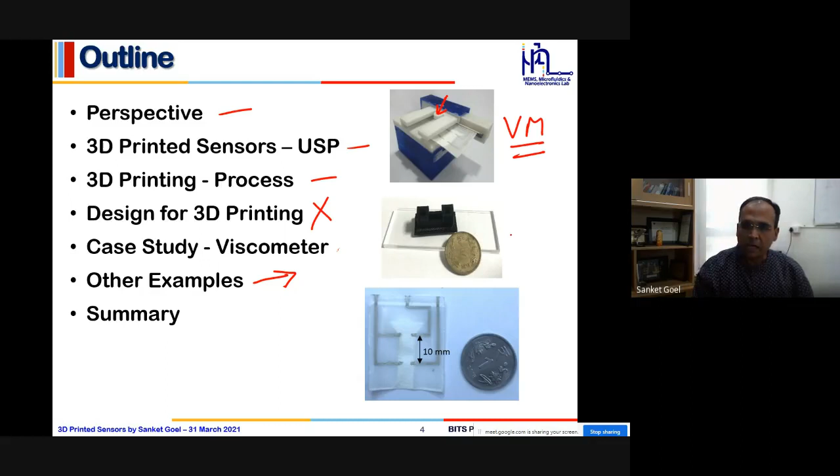And this is the same device, which you can see, kind of a top view. You can correlate it with a 1 rupee coin, which has become kind of a hibernation these days, but still we can kind of compare it.

So before I begin, let me just brag about our lab. It's a very quick video about our lab, what we do and so on, kind of a summary which we made for a funding agency a couple of years back. The lab has really evolved since then as well.

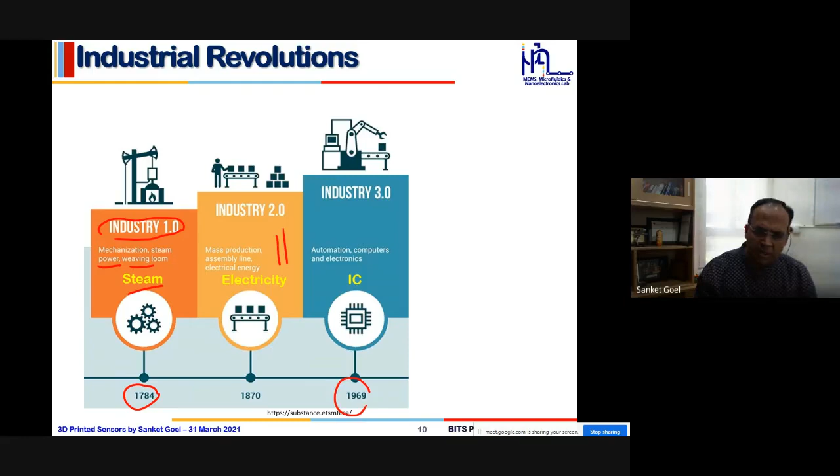And last but not least, what we have today is the internet era, the cyber physical system. So people have started calling today's era Industry 4.0, and that's why they started calling the IC era 3.0, the electricity era 2.0, and the steam era 1.0.

So it is extremely important that whatever we do, whatever we make today, we always see it through the lens of internet and cyber physical systems, so that the work being done today, by us or by a given lab, benefits society at large. And of course it has many more benefits.

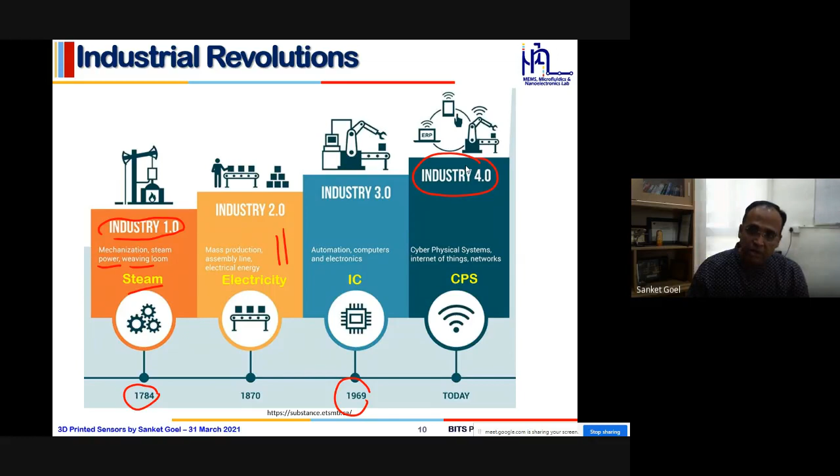So we'll be talking about how these smart sensors can be developed, or have been developed, and how the current niche about Industry 4.0 has been integrated into these systems.

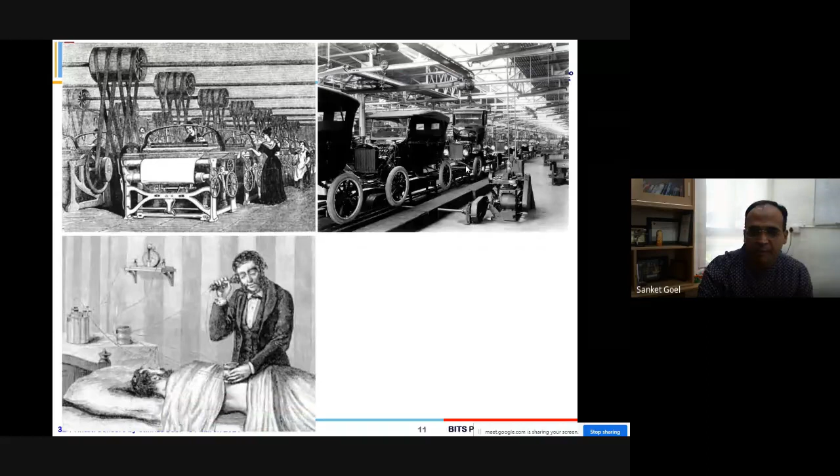So I love these pictures, these 4 black and white pictures. Those of you who would like to participate can certainly answer, except my own students who are here, because they know about these pictures quite a bit.

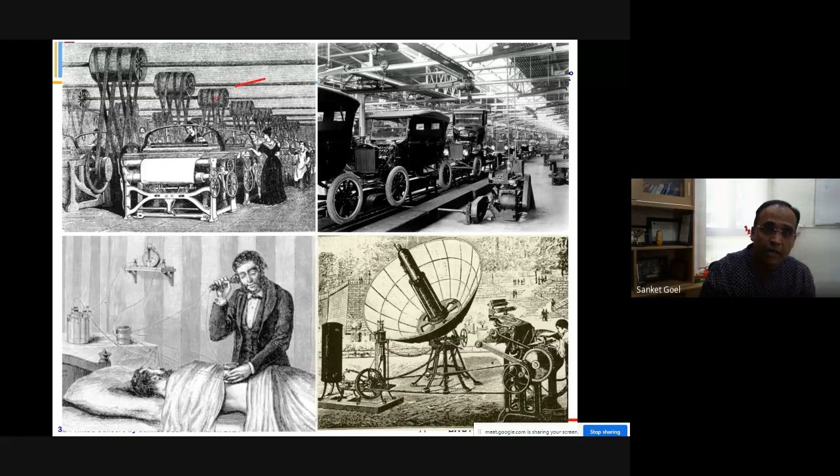So these pictures essentially talk about what industry was like around 150 to 200 years ago. As you can see, these are not just photo-edited black and white pictures, these are real black and white pictures. The top left is more of a textile industry, the top right is more of an automobile industry, the bottom left is say a biomedical industry, and the bottom right is like a solar thermal system.

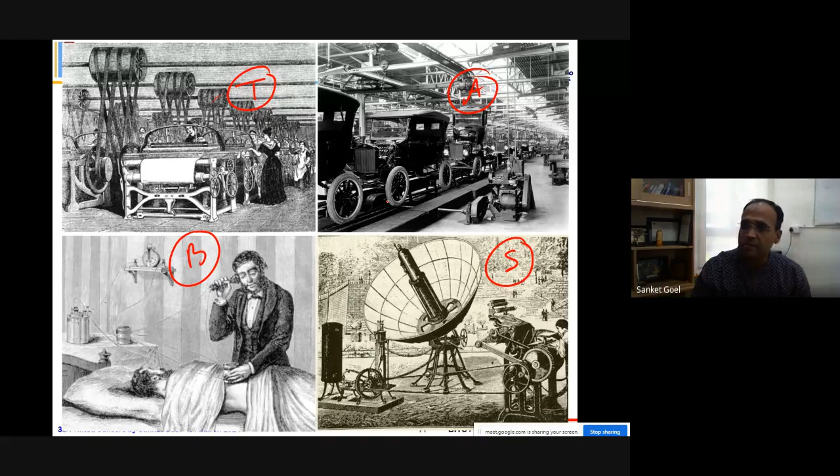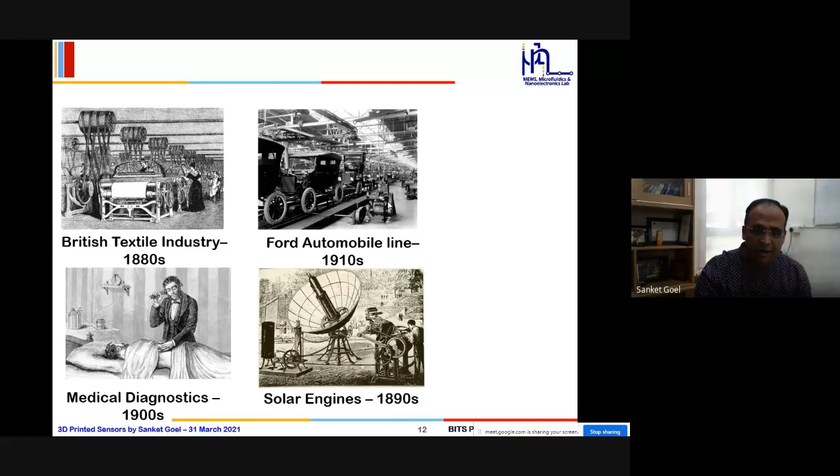One thing you can see, taking the example of automobiles, is that things were not automated - every model, every piece was different, so you couldn't really verify or benchmark each piece. But now, as we all know, things have become automated, reliable, sized accurately, so that each and every bit is the same. If you buy one model of one particular car, they will all be the same, except the color, of course.

So the need for today is we need to work on accuracy, cost, or time - or maybe two of them, or all of them. I use this acronym quite a bit, ACT technology, and that's where 3D printing interventions has really helped to develop some of the smart devices.

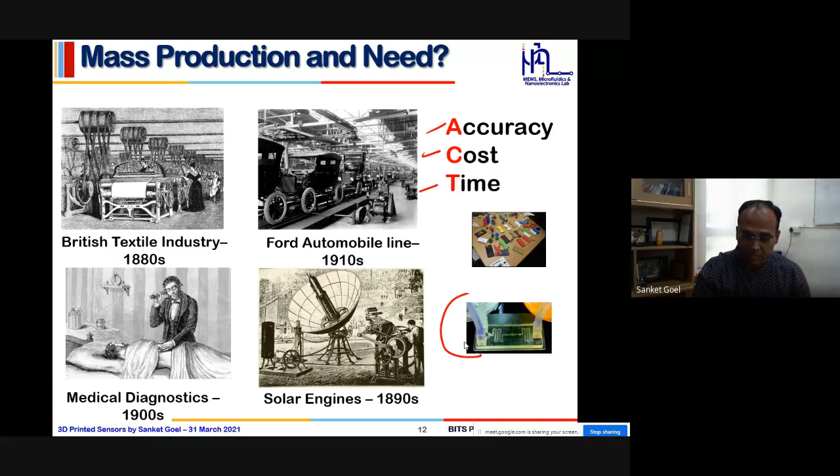So this evolution, as I said, will continue. It has continued as we have been seeing for the last 150 years, and this will continue - there is no end to it. And whatever we see tomorrow, this cyber physical system, as I mentioned, will certainly help develop more smart, more user-friendly, and more portable devices. That is why we can call it ACT technology.

But how? I'm sure that in terms of accuracy, at least for the last year, we have been seeing the way the world is changing.

You need a device which can accurately monitor or detect the virus that is possibly present in our body, so accuracy is extremely important. You should be able to detect virus V1, not virus V2, and not only detect it but accurately, so the clinical practitioner or doctor can decide the course of treatment. Whether it is dengue or fuel adulteration, it has to be accurate.

It has to be accurate and affordable too. Affordability comes at different stages, because in an extremely urgent scenario, accuracy might be more important than affordability. And finally, the result should be fast. That is why these technologies are extremely important, where accuracy, cost, and time all play an important role.

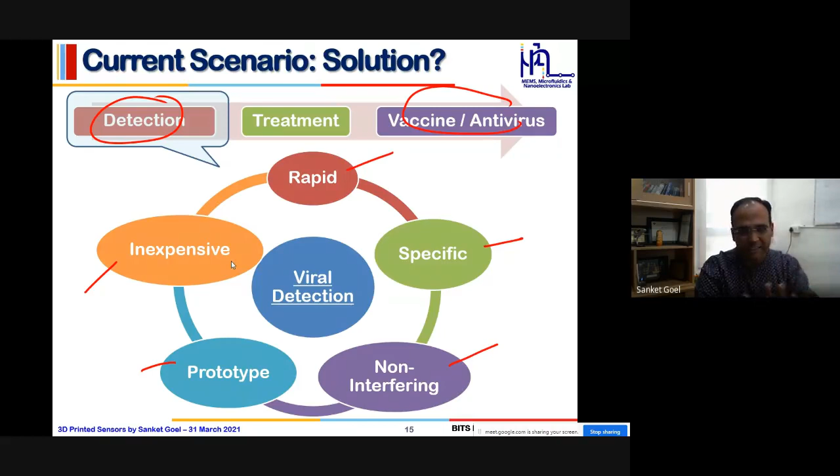How should the detection be? It should have very different virtues - it should be rapid, specific, non-interfering. We can develop possibly a prototype, and of course it should be cost effective. I put cost effectiveness on the extreme left side, because depending on the severity of the problem, cost takes on more or less prominence. So detection has to have these qualities, whether we are talking about viral detection or any other.

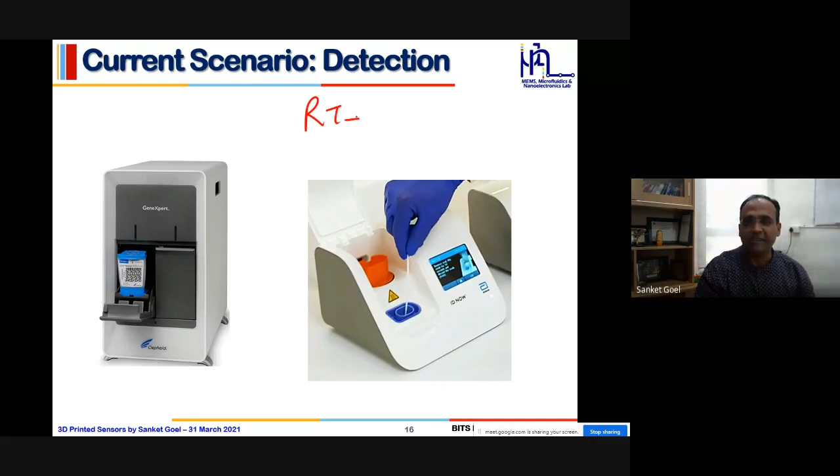Just to give you two quick pictures which I really like - in terms of detection, there are two methods, and I'm sure everybody has become an expert in viral detection now, at least for the namesake. We all know there is something called RT-PCR. We see this word at least 100 times if you control-F any electronic copy of a newspaper, right? So we all know what RT-PCR is.

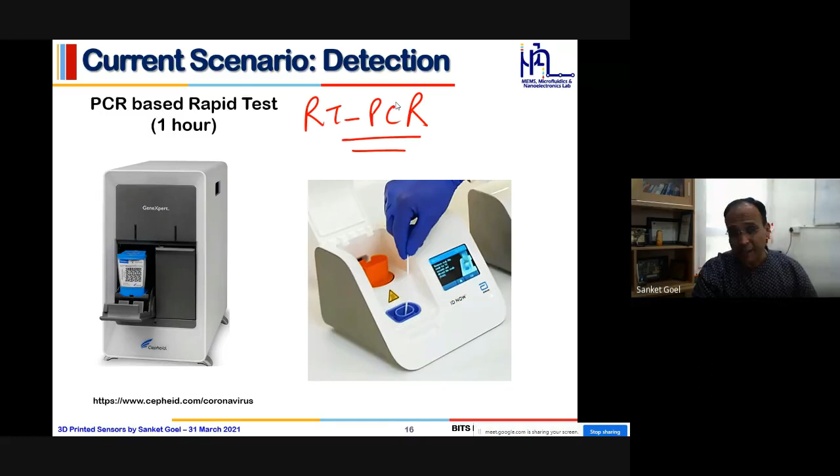You give your sample and you can get the test done in maybe a few hours, if not one hour, at least 6 to 8 hours. And of course there's the antibody test, which was earlier very popular and people used to take, but later RT-PCR became more prominent.

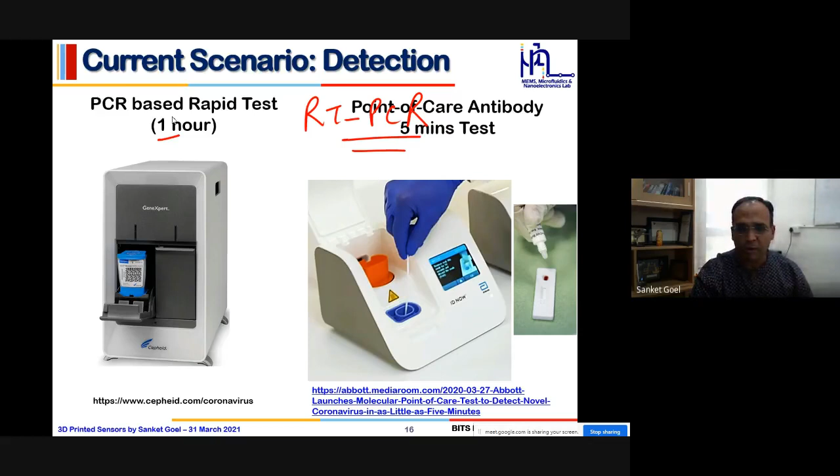But in place of 8 to 10 hours, where doctors have to wait to start the diagnosis, it is extremely important to develop a test which can give an answer in tens of minutes or so. That is why a lot of people are working on it, including us, to develop a device which can give an answer within 10 to 20 minutes. And of course, the antibody test can be done within a matter of minutes.

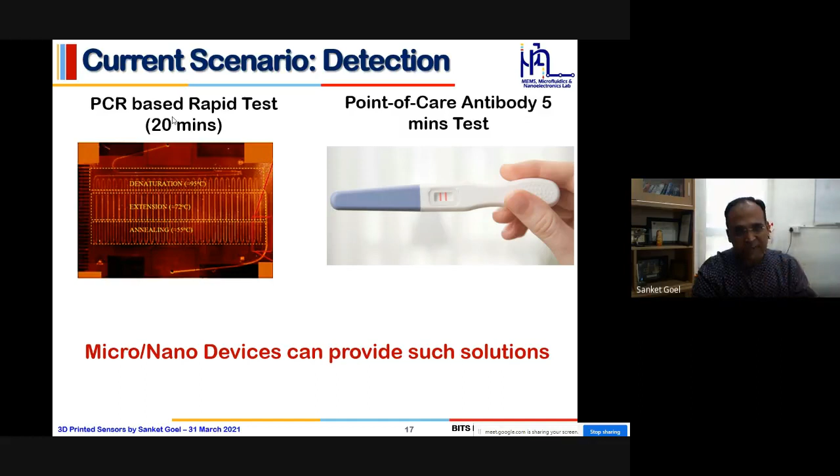So what is the unique selling proposition? I didn't end my story - to be able to develop such devices, 3D printing can, and has, really played an important role, and I'll show you how.

This is not my class, but those of you from college know micro devices are extremely important, because I'm sure you've heard these words in class 8 to class 9 - surface area of a sphere, or volume of a sphere. But this is important, which we might not have thought about: surface to volume ratio is 3 over r. So when you bring down the size of a device, the surface available for further reaction increases, giving you a huge leeway to carry out many reactions.

You can see this from examples like grain dust used on Diwali - when it hits the wall, it booms. Similarly, ground salt dissolves much faster. And also, why does the ant fly, not the elephant? These are some of the fundamentals we all need to understand and remember, so we can digest the importance of micro devices.

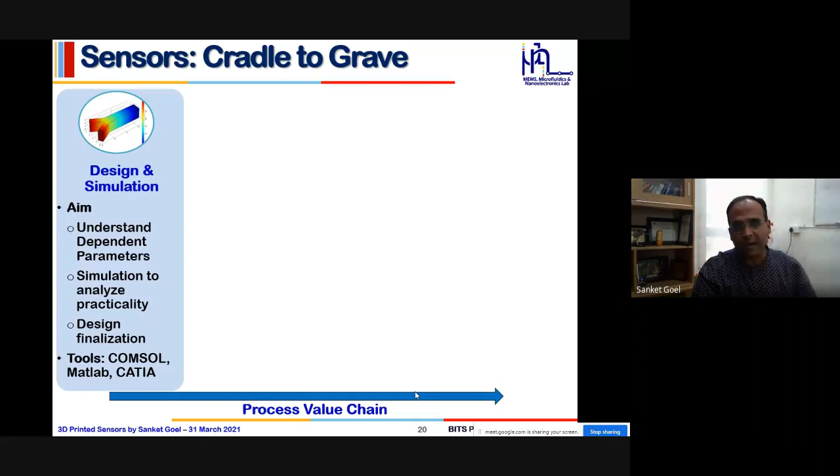To develop a sensor or any micro scale device, there are 4 basic steps to follow. Take any project - even if you're trying to hit a nail onto the wall, you always make a design, either on paper or in your mind. Likewise, if you want to start a sensor development or any new project, you first start with design simulation.

You find the most appropriate way to fabricate the device. Then you also find out the best possible way to detect the output from the device. And of course, you have to test and characterize them.

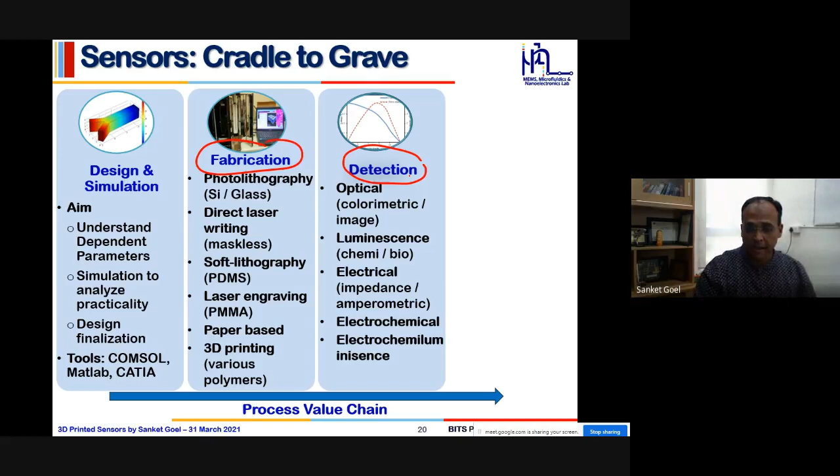So these are some of the different fabrication methods which I have noted down in this particular column. But depending on accuracy, cost, and time, there may be many more parameters, but we can place other parameters in one of these three categories. So depending on what you are looking at, you can decide which fabrication method one has to use.

But in this particular discussion, I'll be more focusing on 3D printing. And similarly, detection can be optical, light-based detection. If you don't want to see images or light, you can think about electrical-based detection, electrochemical, or electrochemiluminescence-based.

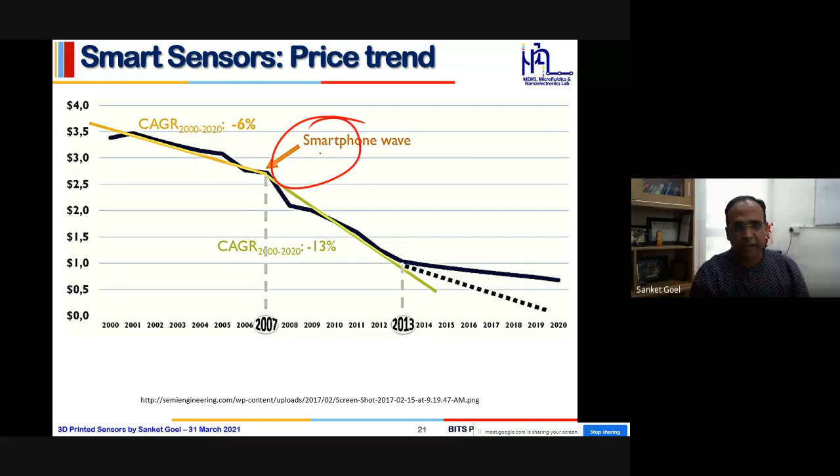So just to give you some of the economical scenario. These sensors have become quite prevalent since the smartphone wave and this wave about the cyber physical system. Also the sensors have a huge market, and if you look at various application domains, you can see how these sensors play an important role for various kinds of application domains.

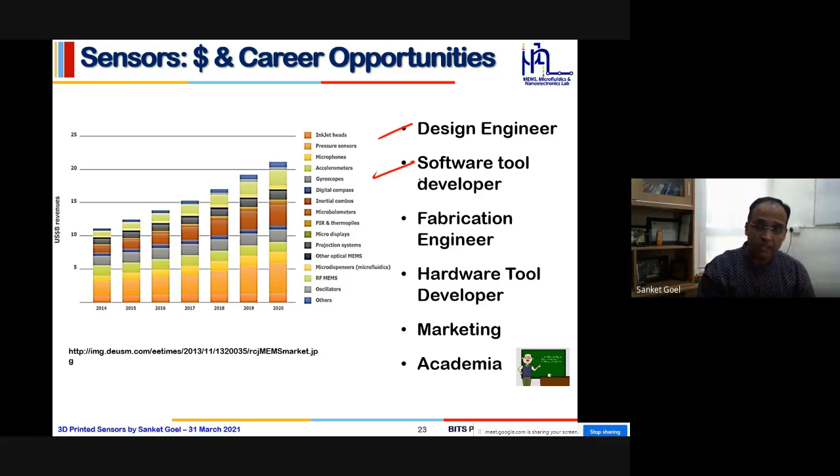So what is the 3D printing process? I'm sure that many of us have heard about the subtractive manufacturing process, especially the clean room based process. What you do is start with a big chunk of material, and then you subtract the material. You try to take away the part or unwanted part which you don't want by using lithography or e-beam lithography or various other methods which are available, and you get your object.

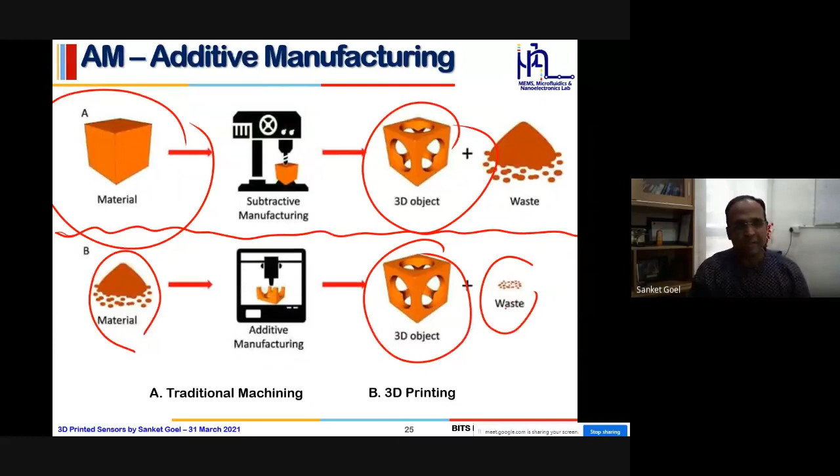However, in 3D printing, you start with smaller material and then you keep on adding it on top, layer by layer. You still get the same object at the end, but the interesting part is that you have a budget in terms of the material you are using for device fabrication. That is the interesting part. However, that does not make it all good in comparison to subtractive manufacturing. Of course, this field is still nurturing, it's quite new.

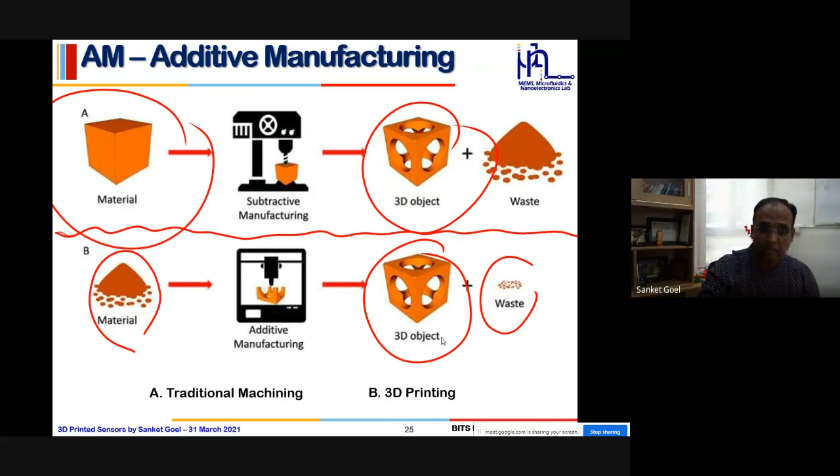You may not be able to get as small a feature size as you can easily get by the clean room based process, like a fraction of microns or even nanometer. You may not get such small scale features by using additive manufacturing process. There are many 3D printing processes, and additive manufacturing and 3D printing can be considered interchangeable terms, but I will not really discuss them today.

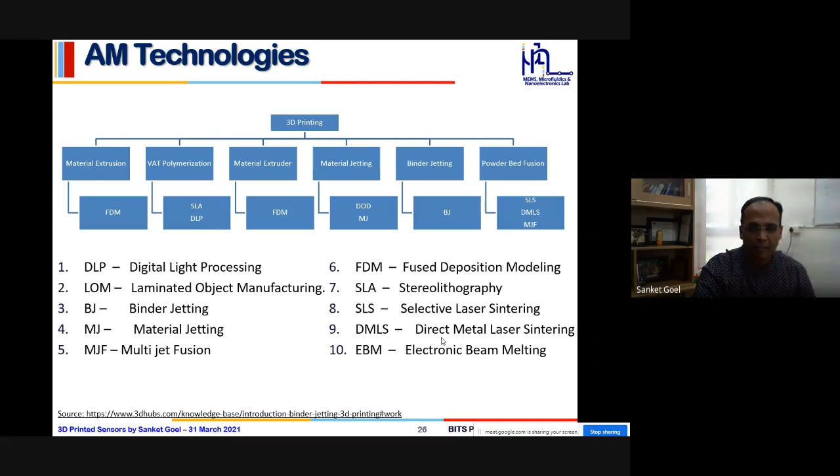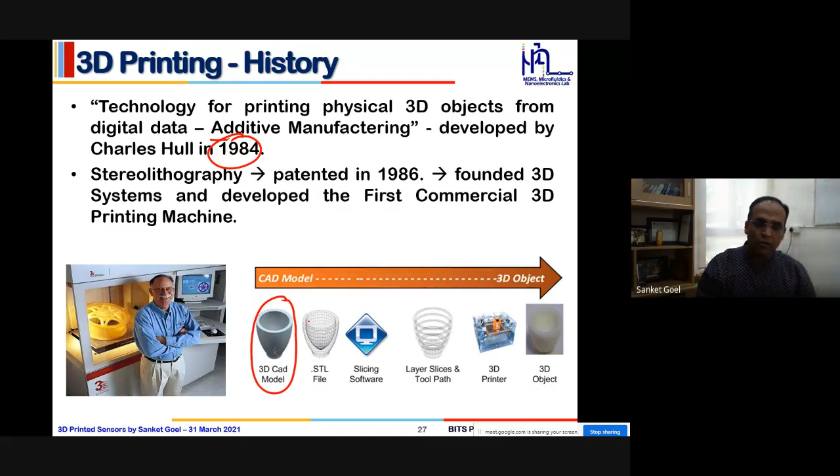But one of the first historical evidence of 3D printing came in 1984 when this gentleman Charles Hull invented this machine. And the idea behind 3D printing is that you first create a 3D CAD model, and I'm sure all of us have used it or are in the process of using it. Interestingly, just from the 3D CAD model, you convert it into a compatible file.

And one of the most important components of 3D printing is slicing it. Depending on the type of 3D printer you have and its resolution, you slice it. For example, for each layer, you can go say 50 microns or 100 microns and so on. Depending on the shape you are providing, you can chop it into many, many slices. For example, if the height of this model is 1mm, and your layer size is 50 microns, you can easily slice it into 20 layers. Each layer will give me one particular fabrication step.

And then you 3D print it and you get the object. That is a simple process, and everything is done more or less software based. The only thing is that unlike photolithography where you have to focus a lot on fabrication and optimization of fabrication method, here you need to work a lot on modeling or developing design. The design is crucial. Design takes the most amount of time. So design, slicing, printing, that's it.

Like you print on an A4 sheet, you control F it, control P it, and then you print it, right? Similarly, you can control P it and print it. That's it, because you have done the designing and slicing in your software itself. So, as simple as that.

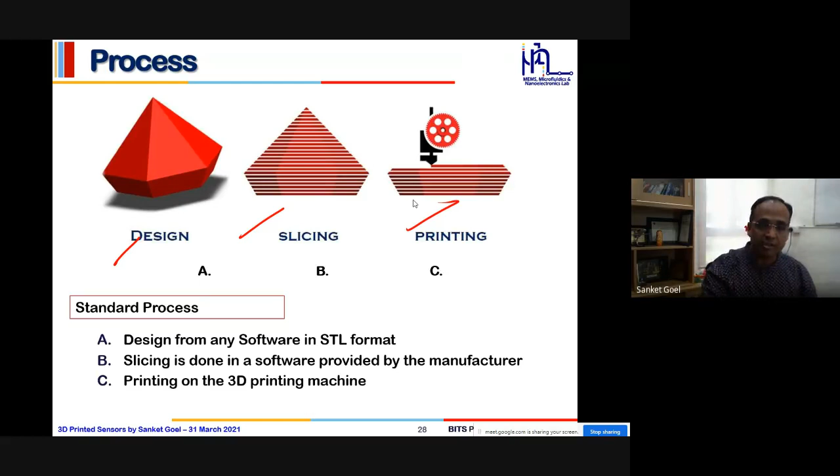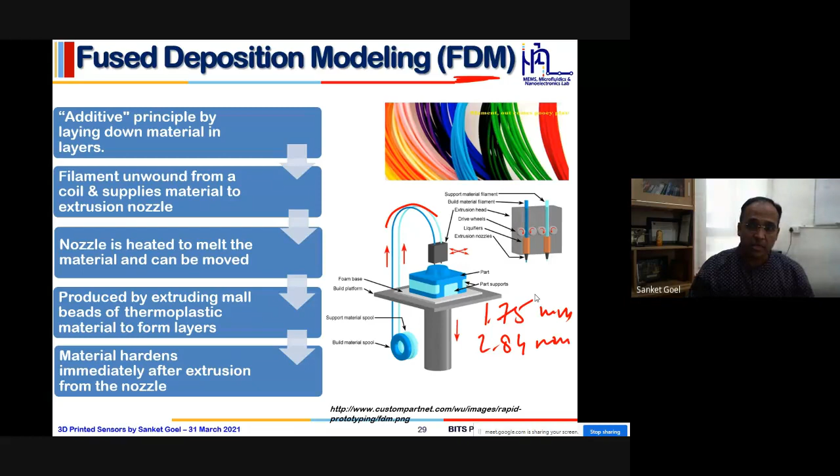There are two popular methods for 3D printing. One is fused deposition modeling, which is based on these tubings. These are either 1.75 mm or 2.84 mm diameter, a standard across the globe. Depending on where you want to dispense these filaments, they get heated, and depending on the glass transition temperature, they get dispensed and solidified immediately. That's how you keep building these structures on top of each other. You can dispense it and solidify it.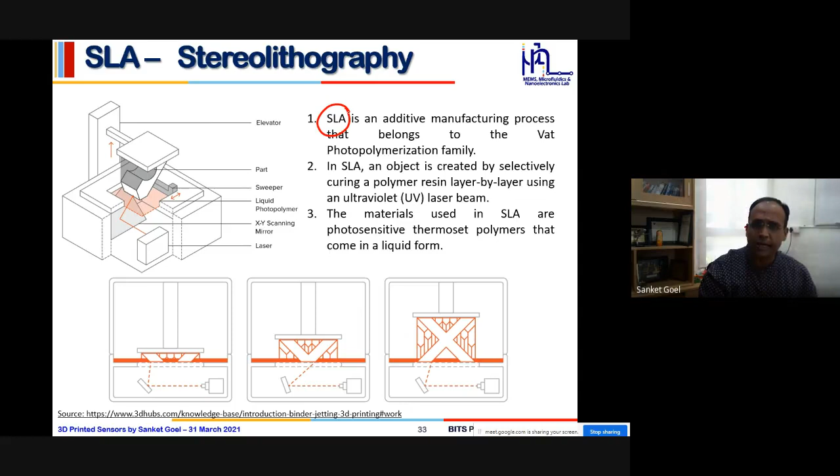It is very similar to photolithography, because there also you use epoxy and then cure it with UV. So in a similar way you use stereolithography as well.

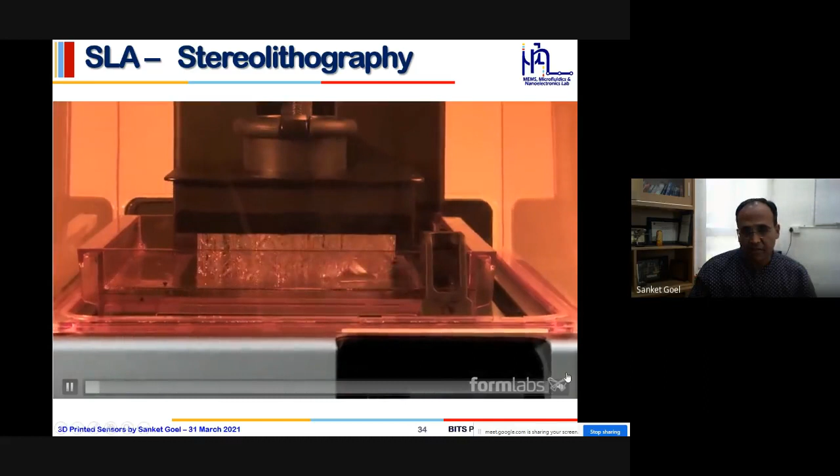Just to give you a quick snapshot, this is my very famous Formlabs stereolithography setup. You fill the tank with epoxy, and depending on the design, you can suck away the part which you'd like to fabricate through 3D printing.

You can dispense it. The build platform is lowered into the resin, leaving only a thin layer of liquid between the platform and the bottom of the tank. Galvanometers direct the UV laser through a transparent window at the bottom of the resin tank, drawing a cross-section of the 3D model and selectively hardening the material. The print is built in consecutive layers, each less than 100 microns thick. When a layer is complete, the part is peeled from the bottom of the tank, letting fresh resin flow beneath, and the platform is lowered once again.

Originally developed in the 80s, SLA was confined to large industrial machines until recently. Now it's accessible.

If you would like to compare with lithography, I'm primarily talking about the positive points only. There are a lot of advantages because it's a very well established technique and you can easily handle it. But there are several limitations, which come from some of the challenges and the tedious process involved.

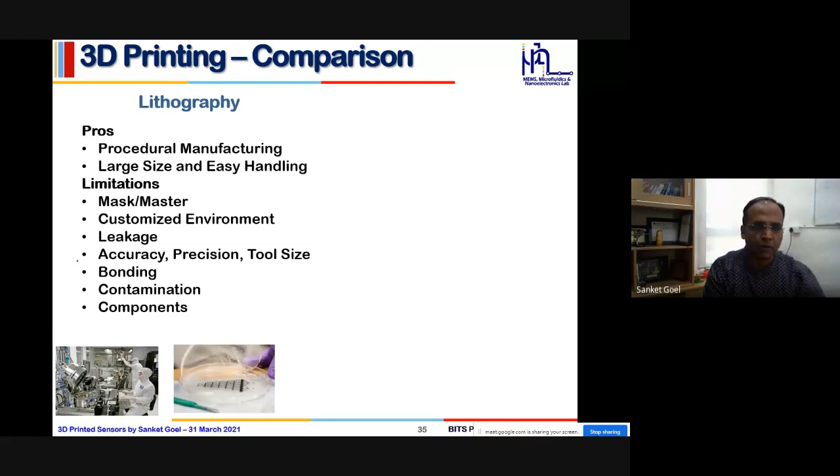Up to some extent, such challenges can be sorted out by the 3D printing method we're talking about today. It is said that in 3D printing, innovation is in design, not in the real chip. There are no hard transactions, no sales tax issues, and no IP infringement. Your innovation entirely lies in the design.

There are many companies, even in Hyderabad, where you can just email them and they will fabricate a device and ship it back to you. And for those who would like to do some academic collaboration, we can also do it for you.

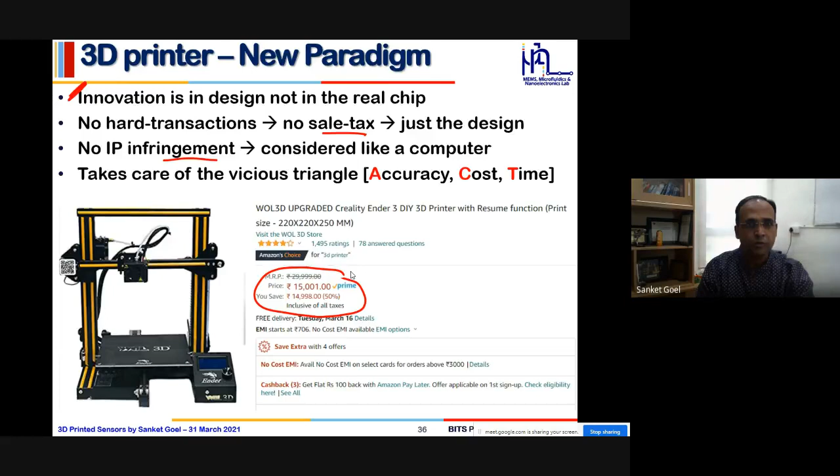This is a screenshot I recently took from the Amazon website. You can see you can buy a very nice 3D printer for as inexpensive as 15,000 rupees. There are also many 3D printing pens available in the market, which you can gift to your kids or use some other way. Many such pens are available, and you can nicely create designs and so on, which is another fancy thing available.

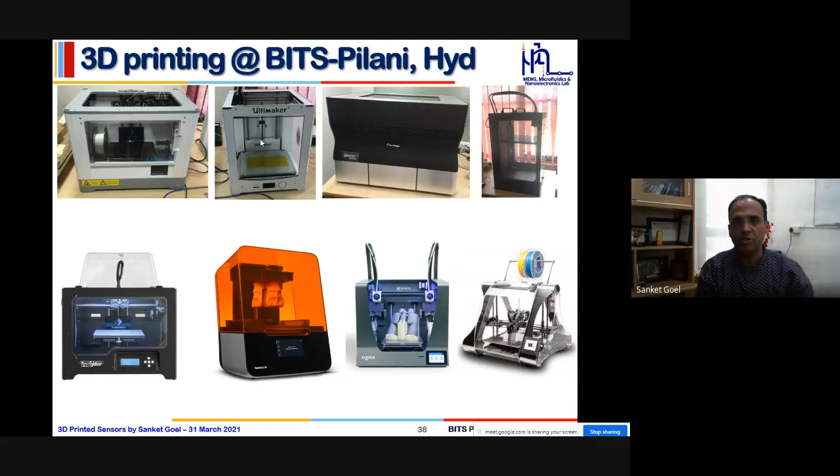These are some of the 3D printers available on our campus, with many of them in the labs. We have 3D printers based on both filament-based and epoxy-based technologies.

Now I'll spend the next 10 minutes on one of the case studies, the micro viscometer, which has been developed with the help of 3D printing technology. One of the first things an engineer would like to know is why we are doing that, why we are developing a viscometer.

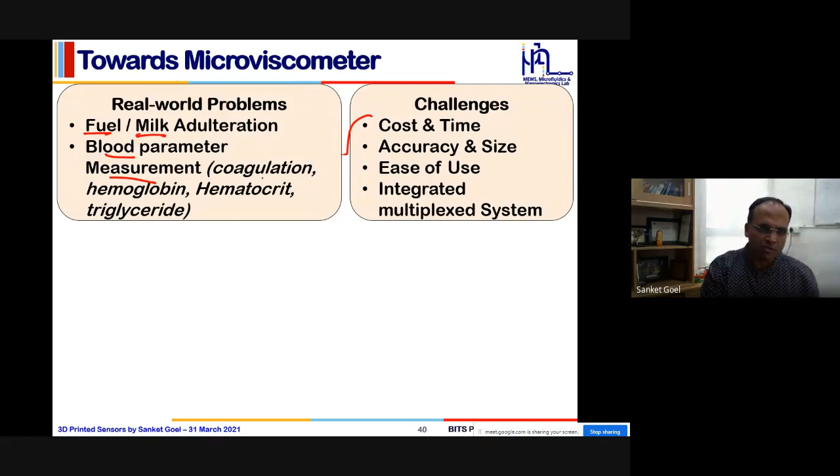I'm sure many of you would also have this question in your mind. So just to tell you, there are many real-world problems like fuel adulteration, milk adulteration, and a lot of discussions on blood parameter measurements. But there are many challenges, and these challenges are quite common, whether you talk about fuel adulteration, milk adulteration, or even biomedical applications.

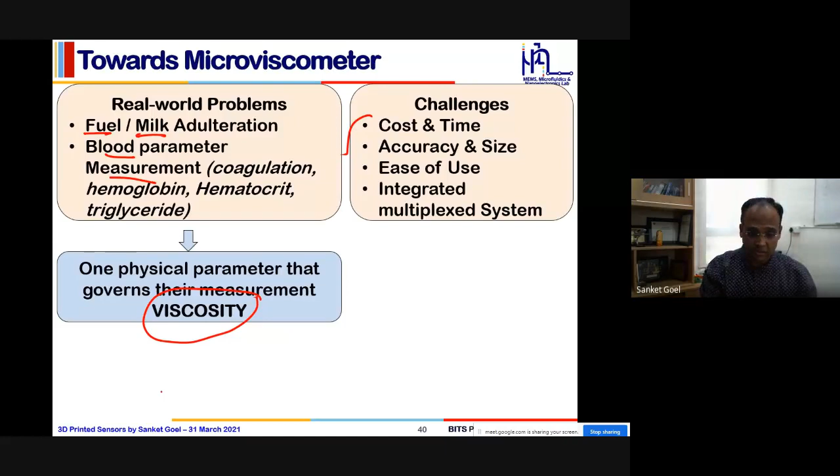One of the common parameters of these applications I've mentioned is the viscosity. If you are able to measure the viscosity, you should be able to find out whether the fuel is adulterated, or milk is adulterated, or measure various blood parameters. We can certainly use the microfluidic concept to do that. So that's why we are trying to develop a microfluidic viscometer, which can help us solve some of these problems. So as an engineer, one of the first things is, what is the equation?

So initially we started with the optofluidic viscometer, where we are trying to understand the width taken by 2 fluids - one side is a reference fluid with known viscosity, and the test fluid with unknown viscosity. Based on the images, we can find out the viscosity. But however, that is something which is not feasible at fuel stations or dairy farms. So we cannot take a microscope everywhere.

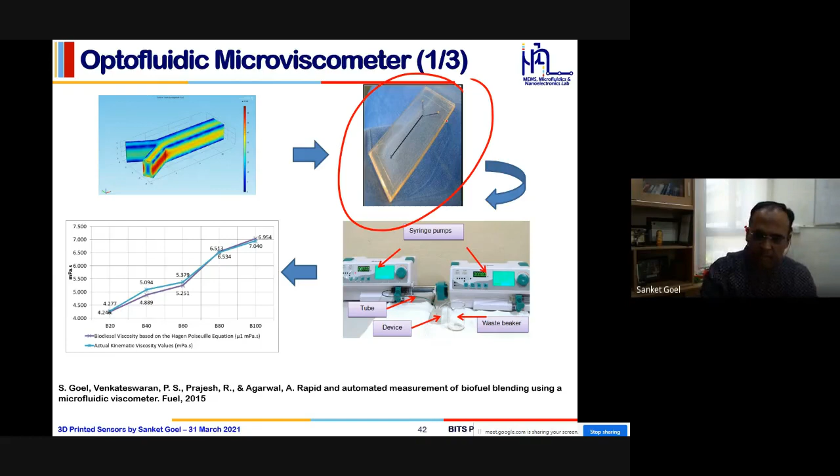So this is a simple device which we have fabricated out of CNC - this is acrylic, not 3D printing. And we created a Y-shaped microchannel. Later on, we created this device - again you cannot see it because it's not very transparent. This is also a 3D printed device which we created later, and we tried to understand how this can be used to find the unknown viscosity.

So you can see that this is another device with 2 inlets and 1 outlet, again a 3D printed device. And we tried to flow the liquid and then use image processing to be able to find the viscosity.

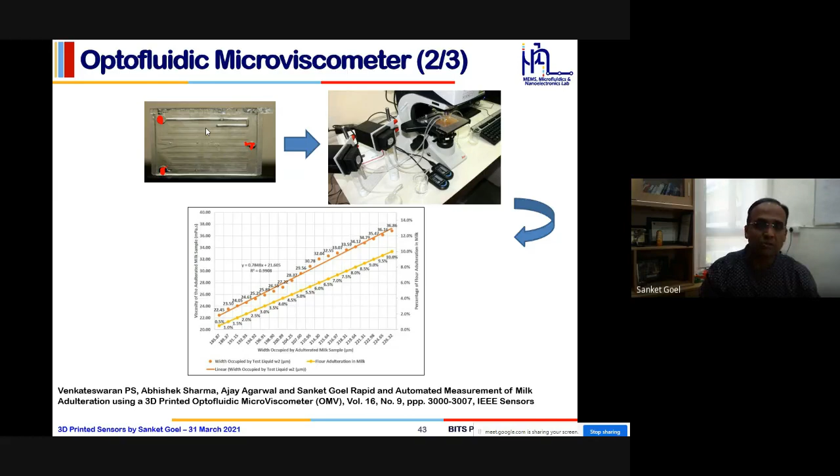But later on - I'll skip that - we tried to make things much simpler. We tried to use a device made out of paper, as I have shown you here. It's a slightly different design, which I have in my hand. But the whole idea was that if the fluid is flowing from top to bottom, the goal was to find the time the fluid will take to cover a known distance. That's it. Because of the inherent capillaries, fluid will flow.

The borders are made of wax. We used some simple methods to create these wax boundaries, with a very, very simple design. We can see there are two very crude electrodes which were there, from one of the first or initial experiments which were developed. And then this is another device which we created, which can again be used to measure the viscosity.

So, because we are using wax quite a bit, there are several fluids which have adverse reactions with the wax, so we may not be able to use these devices for those fluids. These wax are injected by 3D printing only. There is a special filament called PCL - I don't remember the full form right now, but you can Google it and find out.

So what we did, we just 3D print this filament on top of it and heat it so that this PCL material goes on the other side. So we have a nice boundary of the wax. So when we flow the fluid, it does not diverge away from the channel which you see in front of you.

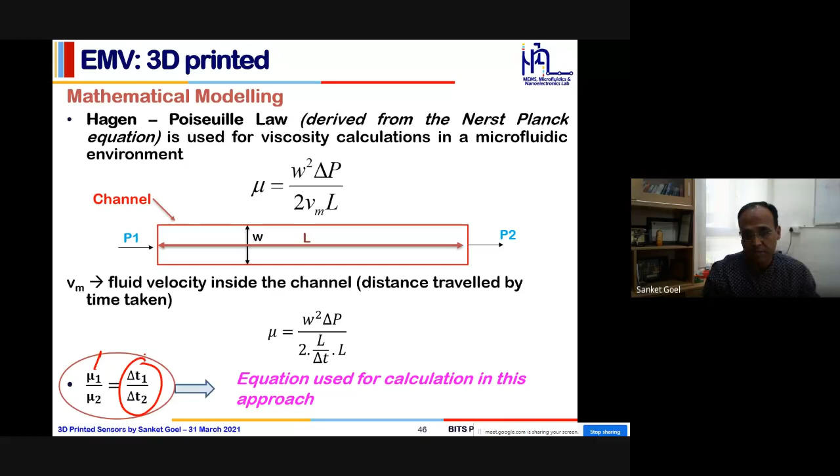And then we have created a real 3D printed device so that we can find out the unknown viscosity by using simple relations. The idea was simple: you have a microchannel, a straight microchannel, and we have 4 intersecting electrodes. The idea was that we need to know the distance between the 2 consecutive electrodes.

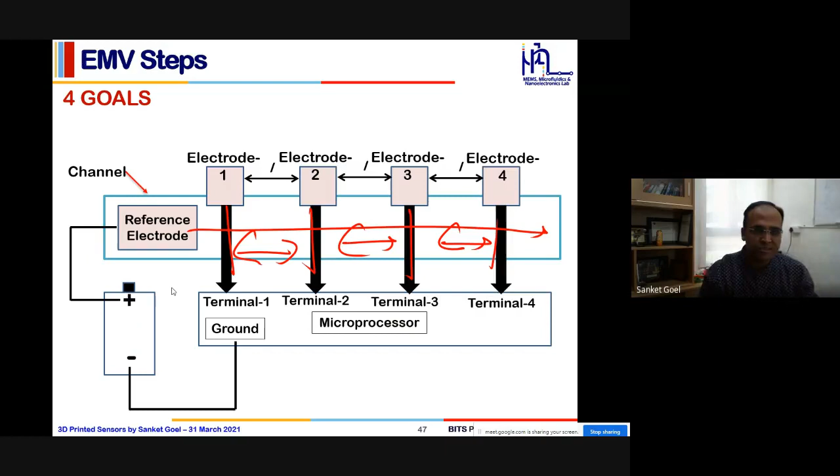And we have to use some microprocessor to complete the automation process, and also to know the time between the 2 consecutive electrodes. So this is a conceptual design which we have developed: microchannel, electrical contacts, microprocessor, and the overall device development. For the 3D printed device, we have done a lot of permutations and combinations to find out the best scenario for such paper-based devices - what design and shape of the inlet, what color of the wax we can use, and so on. There are many parameters which we have tried to use to come to the best possible parameter.

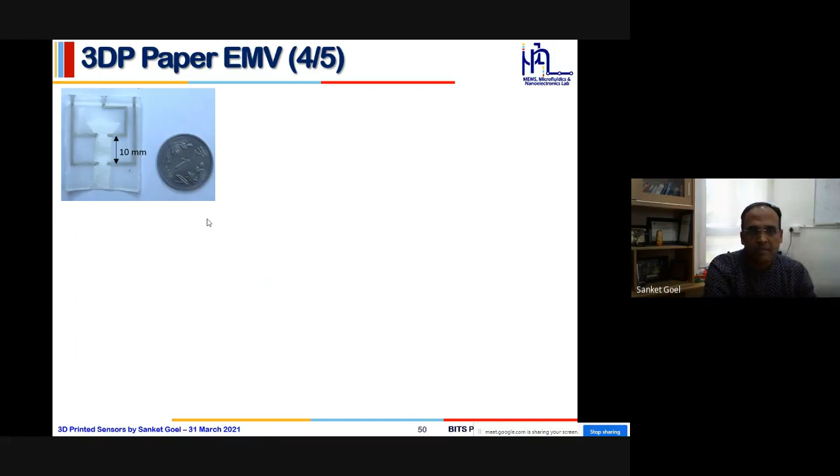And you can see that this is a simple overall circuit. Of course, power supply has to be there, which we later miniaturized, but just a simple device can possibly measure the viscosity. As I have been keep on showing you, this is the final 3D printed device, which you can certainly keep in your hand, like 2 inch by 2 inch by 2 inch.

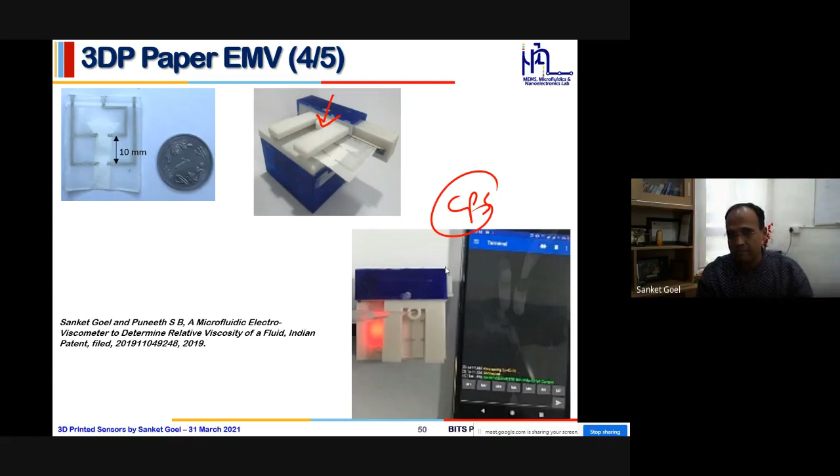By this device, you can just inject your sample from here, and the sample will flow, and you can measure the viscosity. As you can see, CPS - I told you in the beginning - it is connected through Bluetooth or IoT to a smartphone. And the smartphone not only captures the data, but also provides the power required to run those microprocessors, which are underneath this box.

So now how do we use that? We have used them to understand protein detection. Lysozyme is a very popular protein. Interestingly, what we have done, we have tried to heat the protein, and based on discussion with biologists, we found that when you denature the protein - before and after denaturing - the viscosity changes, and we have tried to correlate this with the way denaturization is sensed in a conventional manner.

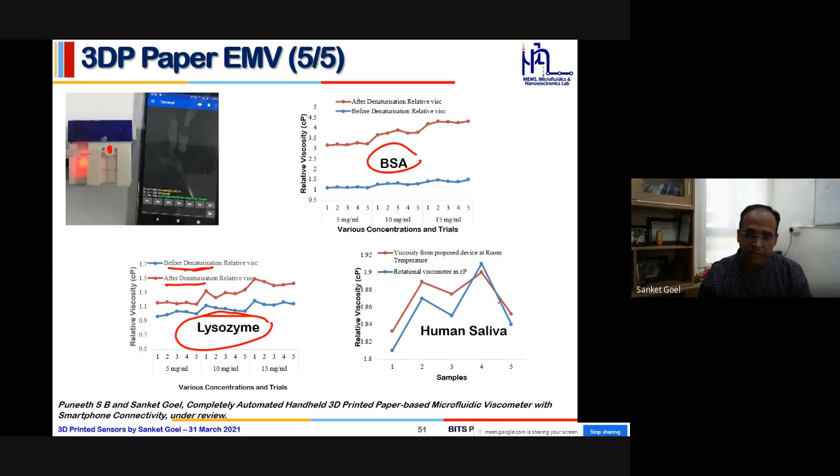Similarly, albumin - the bovine serum albumin - was studied, and we have also studied human saliva for various samples, and how the human saliva is changing and indicating some other effects, which is not shown in this particular slide. Later on, we have used another method like image processing.

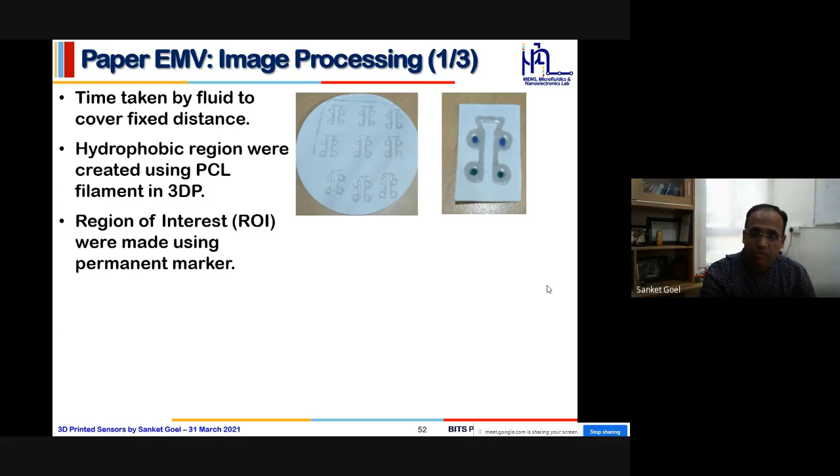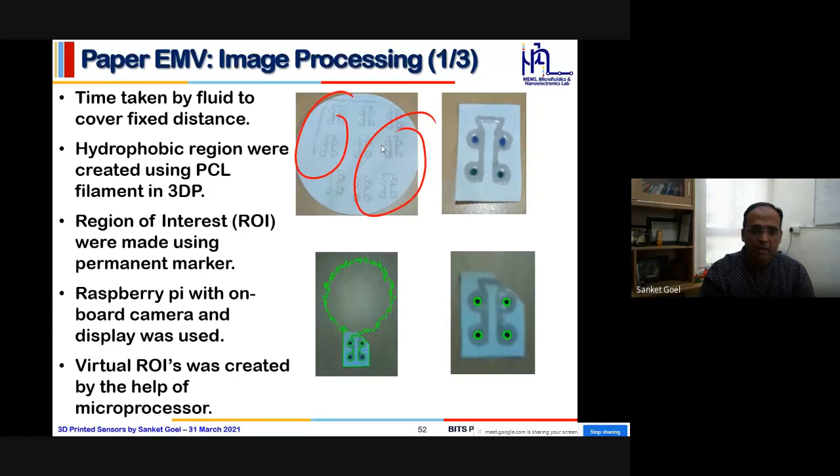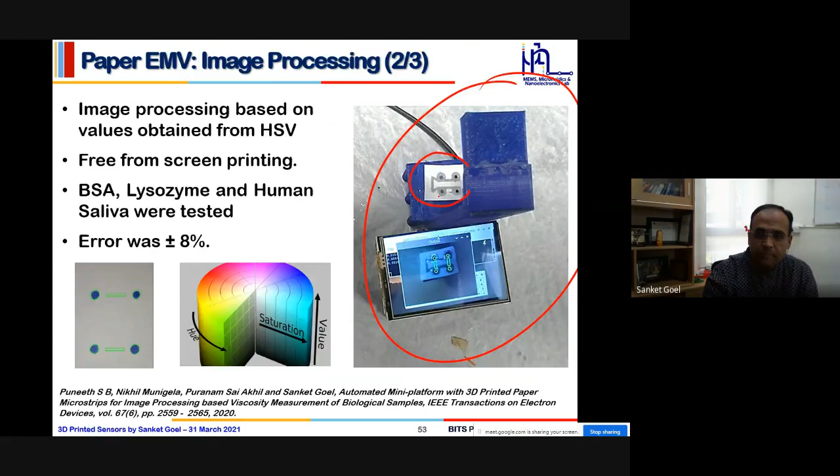So this is the whole device, which is here. You can see the 3D printed paper device can be just placed here, and after completing the complete algorithm of image processing, you can find out the viscosity. And the same kind of experiments have been done to complete the proof of principle of such devices.

So the whole idea was to completely replace the current Ostwald viscometer. I'm sure those of you who have done some chemistry, or who have some flavor of chemistry, must have come across this Ostwald viscometer.

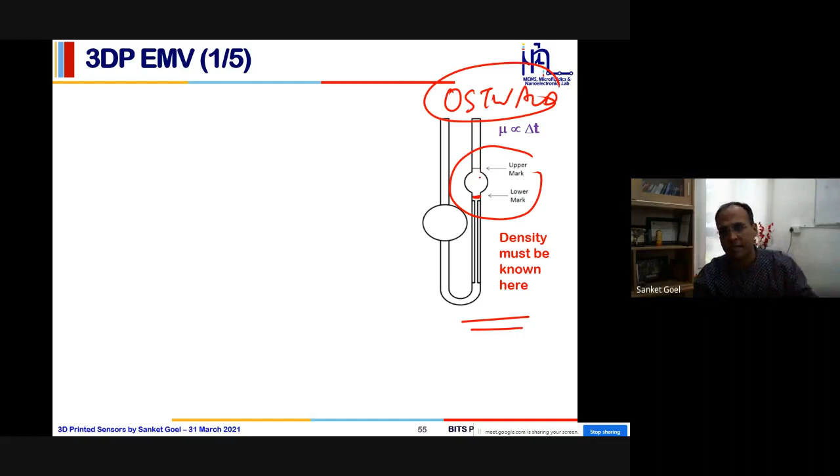It has a U-shape kind of structure, and the way it works is they measure the time the fluid takes to go from the upper mark to the lower mark, and that time is an indicator of the viscosity, right? So the same thing we have tried to mimic in our 3D printed device.

As I showed you before, we have a microchannel and intersecting electrodes. The only thing is you have to find out the time the fluid takes to cover the neighboring electrodes, and that will again be an indicator of viscosity, like I showed for the Ostwald viscometer.

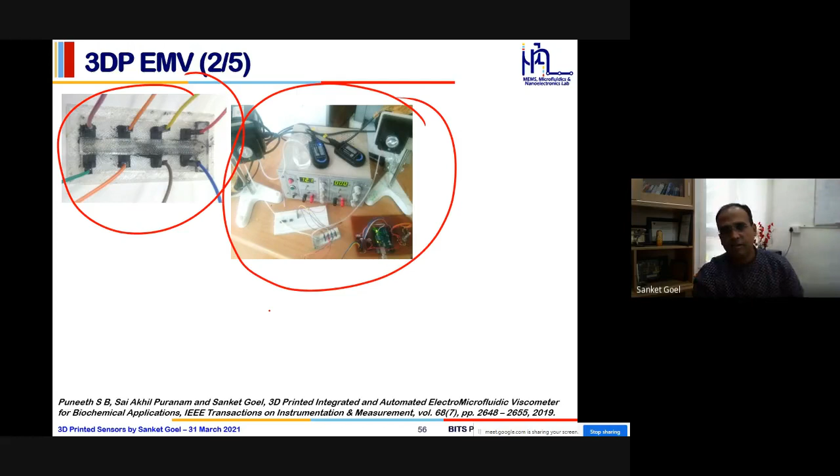You can see that this entire thing is a lab-based prototype, which has very messy electronics and so on. We were able to measure the viscosity of some chemicals, some regularly used fluids, as you can see here.

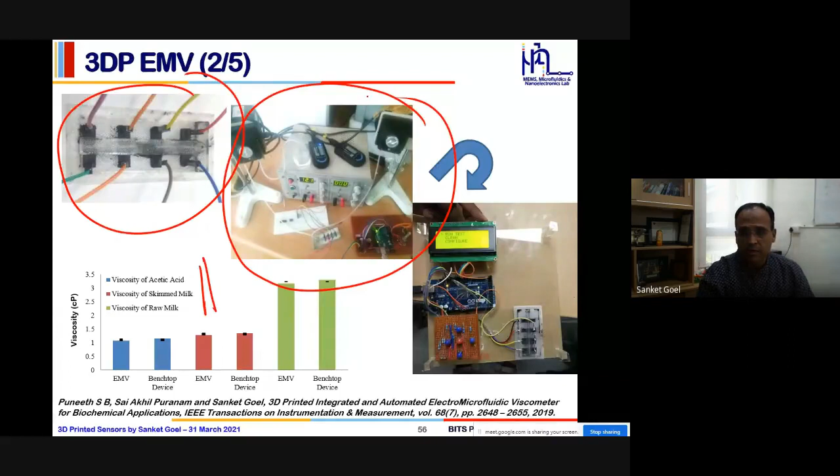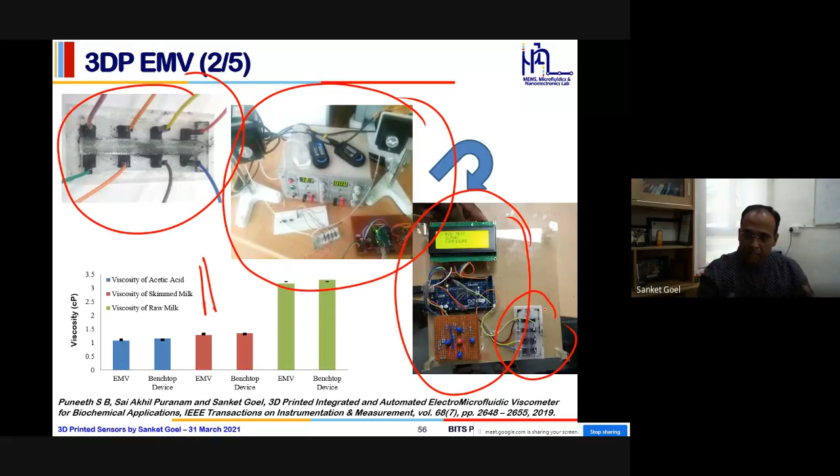Later on, we tried to integrate some of the bulky parts like power supply and pumps into a small box, so that the 3D printed device can be made plug in and out to complete the whole process. A lot of circuitry and internal work has gone into this, which I don't really want to discuss in detail.

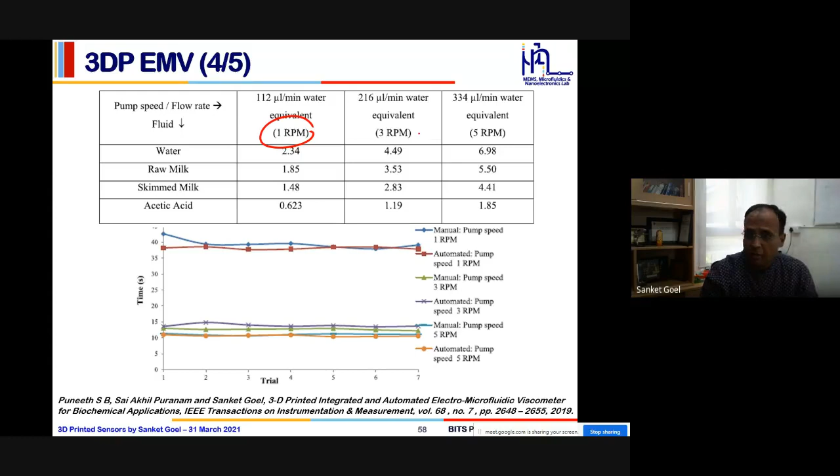A lot of other parameters have been optimized, like the flow rate, the Reynolds number, and so on, to be able to build this optimized 3D printed viscometer.

You can see that this device, in its current shape, is around 6 by 4 inches. It's a plug-and-play 3D printed device with an inbuilt pump. The entire housing has been developed in the lab and in the workshop to create this 3D printed viscometer.

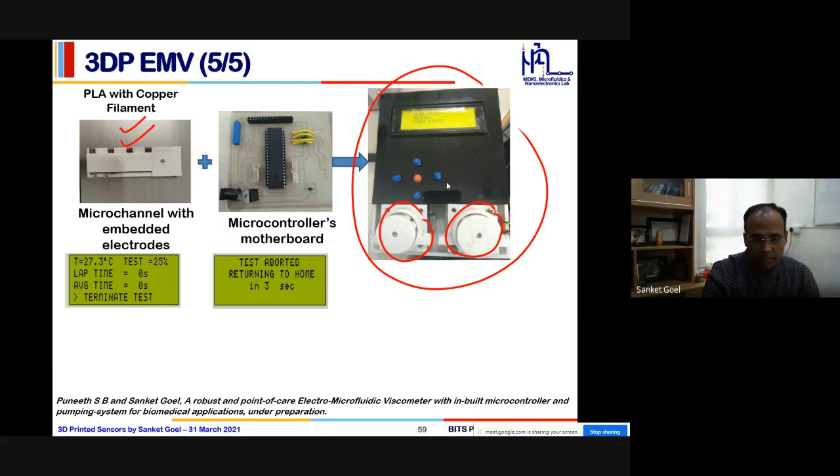We can set up the timing, running, priming, everything is there, and we have tested them for several applications.

This is something I thought to share with you: we have tried to develop three different versions of the viscometer. The fully 3D printed device, including the pumps, circuitry, and packaging. The second is the 3D printed paper-based device. And finally, the image processing-based 3D printed device, which has been tried for many applications.

So that's about the 3D printed viscometer.

Our lab has been working on other applications too, where we try to use 3D printed devices for several applications. I'll try to sum it up in the next few minutes, if you permit me, Professor Prempal.

Is that okay? Yes, please, go ahead.

So there are a few more examples I thought to put forward. We have been working quite a bit on biofuel cells. Fuel cells, as we all know, are chemical devices which have electrodes and electrolyte.

As you can see, this particular device has electrodes, cathode, anode, and electrolyte, which can suck from this side and go towards the waste, towards the absorbent pad. This device, you can see, is all 3D printed.

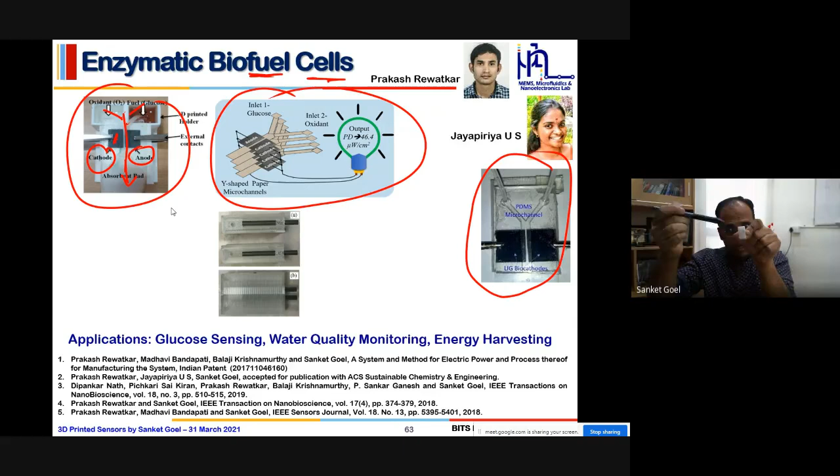You can clip them together, and you can also appreciate that the device has two inlets - one here, one here - and one waste outlet, somewhere here. So this whole device can be 3D printed and nicely used for power harvesting applications. In this case, we are using simple pencils as the electrode because they're made of graphite.

This is something like this, which I just showed you. And this is another design - of course it's not 3D printed per se, but this is another design, something like this. Beyond the glucose fuel cell which I showed you in the previous slide, we have also been working on microbial fuel cells, because microbes themselves have huge potential to power up many devices.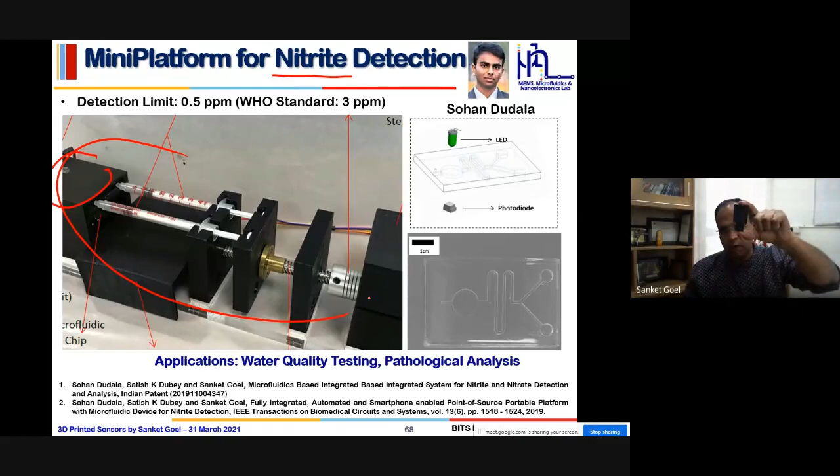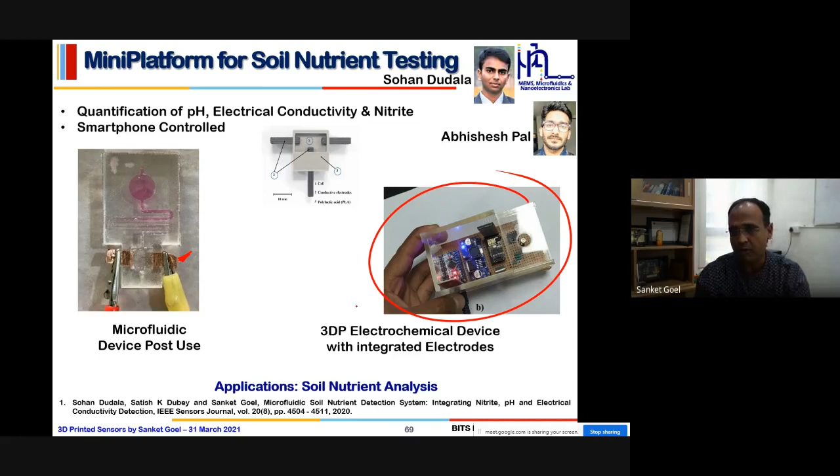This device has also been 3D printed, and we have cast the polymer to complete the entire device. This device is also extended to measure pH and conductivity as well. So now we have a very miniaturized device that is popularly used, in a simple manner, for nitrate as well as nitrite detection.

I think there are one or two more things I'd like to show before I conclude. This is a quite new domain which we are trying to work on - a nasal plug we are trying to develop, which has HEPA filters to filter out the pollutants, as well as electrodes.

The idea of the electrodes is that we can electrochemically sense some of the specific pollutants and specific external entities. So this device can be used both as a filter as well as the detector.

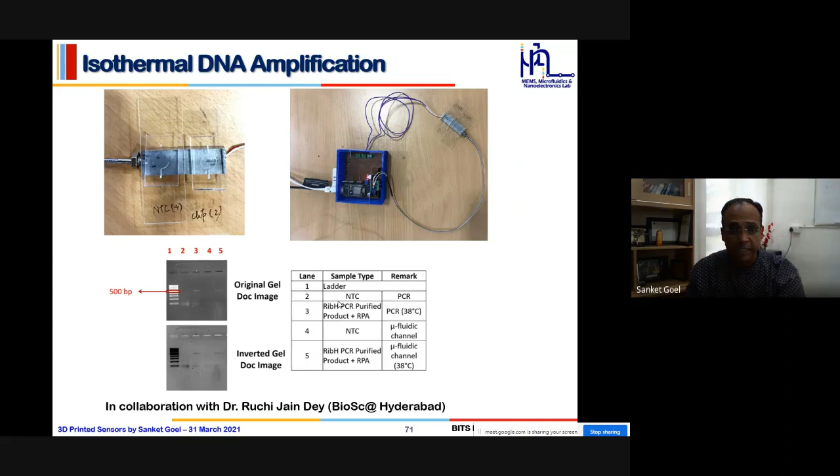As I told you, some work which we have been doing is on DNA amplification. We have been trying to develop a device, as shown in the initial set of my slides, showing how simple devices can be used for DNA amplification. This device has been used for nanomaterial synthesis, but our work on DNA amplification is still under review.

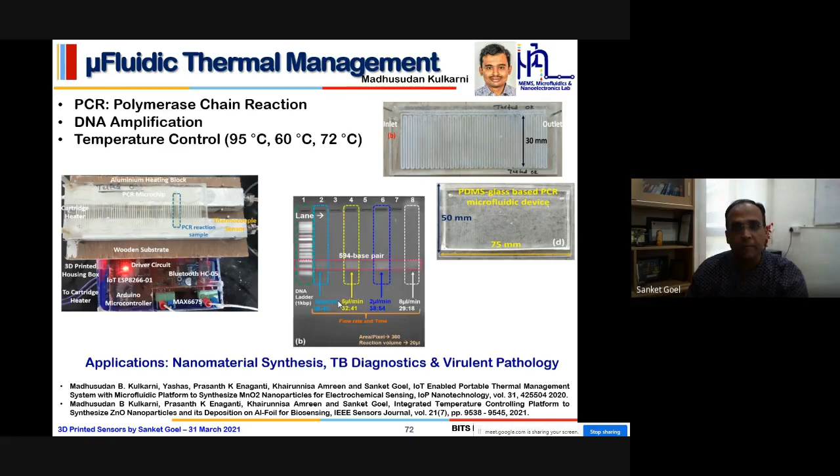So just to summarize, in this last minute I have tried to share with you some perspective of these 3D printed sensors and some of the USP in terms of the development mechanism of these sensors. I tried to show you one example of a viscosity meter, and finally tried to reflect upon some of the other applications where 3D printing has been used for various sensing and monitoring applications.

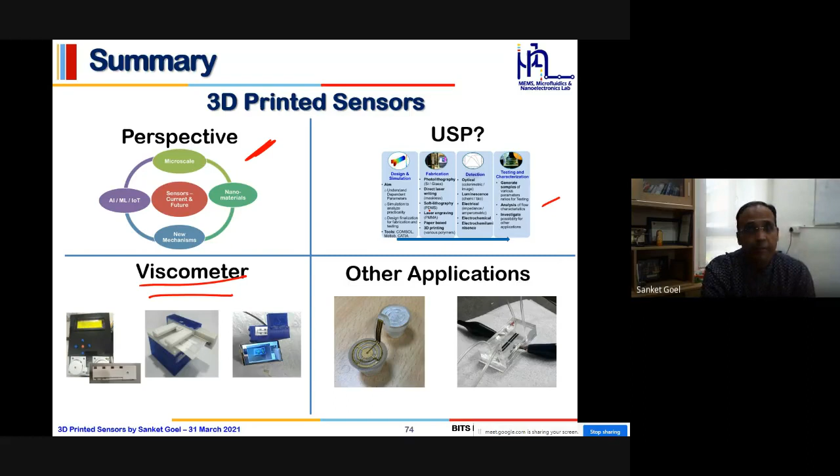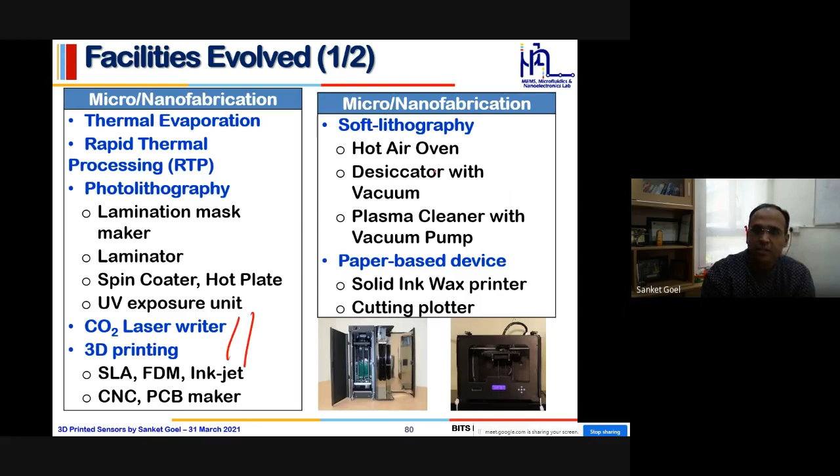But we have a diversity of projects, fortunately, and during the course of the work and the projects, we have tried to develop various facilities which can be used for fabrication, characterization, and different testing and so on.

We also have a small clean room in our institute, around 600 square feet or so, whereby we can do the wet etching or the complete range of photolithography, including the metallization and probing and so on. So I just thought to share a quick video about the clean room as well.

So I just thought to bring this slide. I know we are rushing, but there are a lot of sub-projects, a lot of miniaturized development taking place. As I told you, with the course of the project which we are having, a lot of work has been done to not only fabricate and design the devices, but also to develop a turnkey device, and thereby we need projects like power boosters and some IoT bit integration.

To be able to miniaturize the devices, we might need to work upon developing some measurement tools like potentiostat and spectrophotometer. So we are trying to look for some more collaboration where we can seek some support to develop some of the other parts of the project which we are not really expert in right now.